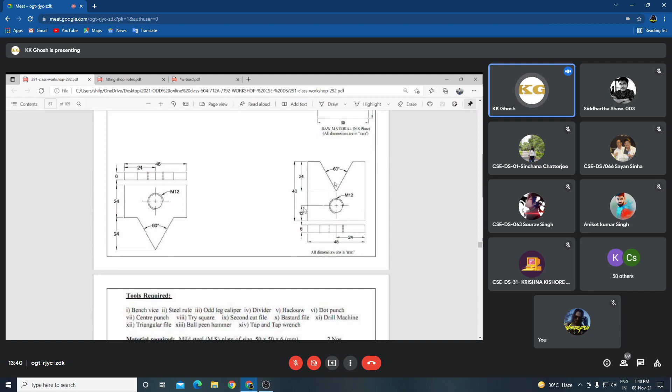Yes, sir. Okay. Next, to produce a V groove or drill hole or V projection, we have to use these types of tools in this shop. Tools are bench vise, steel rule, odd leg caliper, divider, hacksaw, dot punch. All things you will see in your live class. So you will ask the teacher, Dhiman sir, please show us these tools. So you will get a rough idea or 3D view of these tools.

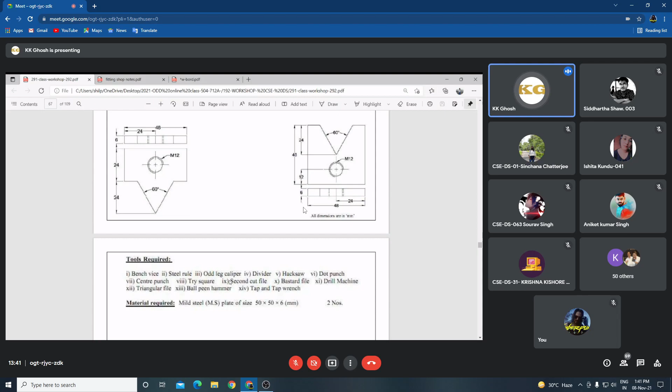Material: mild steel. MS, mild steel plate. Size is 50-50-6. So you will read the manual carefully because in your viva, we will ask you in your fitting shop which type of material you have used. Your answer will be mild steel, not MS. If you tell me MS plate, then the next question will be: what do you mean by MS?

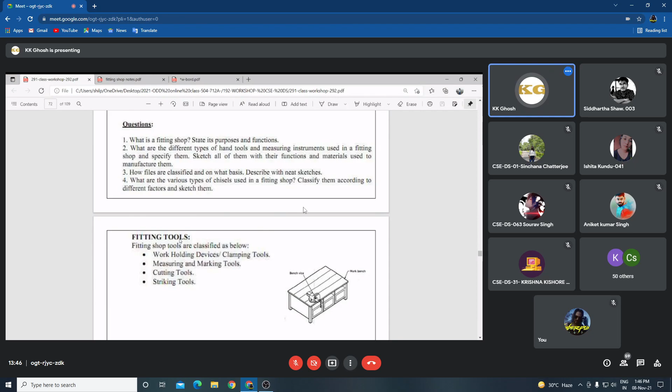Okay, now the question is: what are the different types of hand tools and measuring instruments used? Now I'm showing you fitting tools. These are the different types of fitting tools that will be used for this shop - four types of tools: work holding devices (holding tools), measuring and marking tools, cutting tools, and striking tools.

Holding tools will help you to hold the workpiece or the job. Measuring and marking tools will help you fix up the dimensions on a raw product to produce a finished product, helping you mark and determine whether you will remove or add some material.

So marking is complete through the help of marking tools. After that, there is the cutting tool. Cutting tools will help you cut at your mark line or marking position.

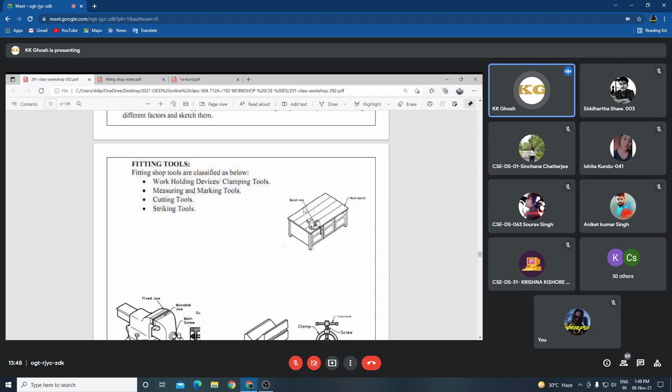Now, work holding device tool - one of them is this table. On this table, a vice is there. This vice will help you hold your job. If you see this, that is your vice - this is your bench vice. If you rotate this handle, what will happen? A gap will be produced, and in this gap you will place your job to hold the device.

Another thing, that is the V block. The V block will also help you hold a cylindrical object.

In today's operation or experiment, you have to make a V block like this, which will help hold cylindrical objects. In your shaping machine, in experiment number 2, we will produce these types of objects, which we will use in the fitting shop to hold a cylindrical object like this.

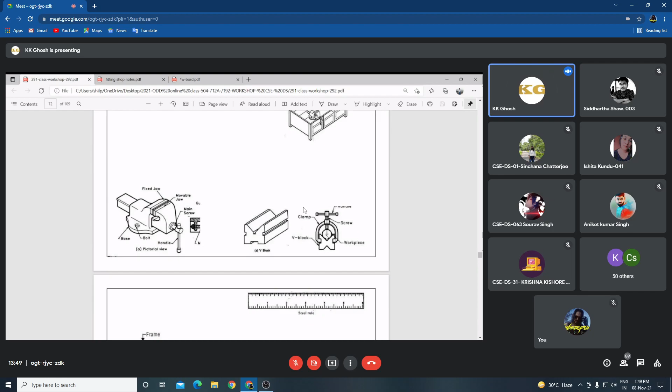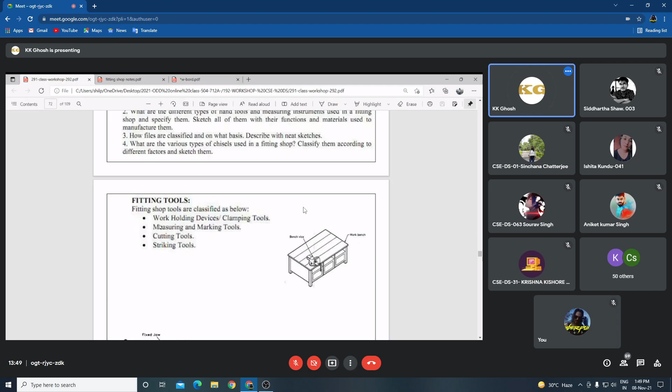So this is your holding tools. That means this is your holding tools. After that, we will discuss measuring or marking tools and cutting tools.

Steel rule is also a measuring tool. Caliper, different types of caliper is there, inside and outside - all are measuring tools. That means you will take some dimension, maybe 10 millimeter, 12 millimeter, with the help of this caliper, and you will place it on the rough surface and mark where you will use the cutting tool to remove the metal. And this is the cutting tool.

With the help of this cutting tool, you will remove extra material present in your job or on your partition line or cutting line. So these are the cutting tools, and this is the measuring tool. You will give the different types of cutting tool and measuring tool details in your notes. I am showing you samples of cutting tool, measuring tool, and holding tool like this.

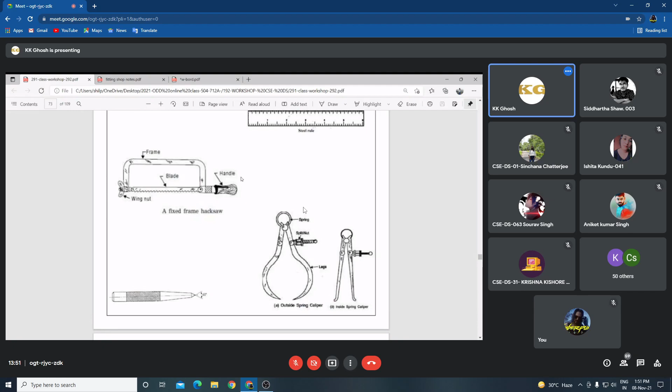Next, file. File is a tool used for striking purpose or finishing purpose. That means these tools are the finishing tools. Hammer and file are used in the fitting shop for finishing purpose, to finish the job and get a smooth surface finish. For this, we will use this type of tool.

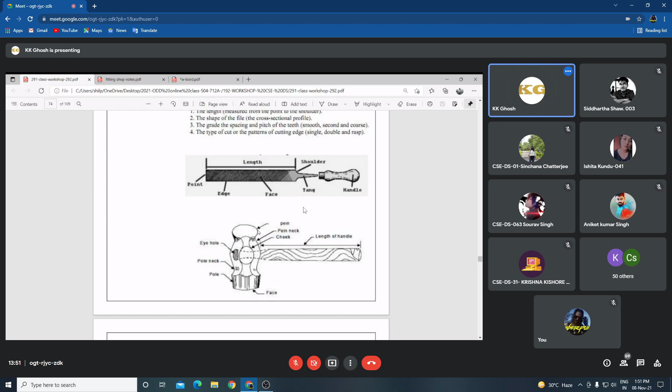Clear? Yes sir, okay yes sir. Now we will try to find the answer as well as details of these different types of tools and procedures. That is why I am showing you the notes that I will provide you after completion of your experiment.

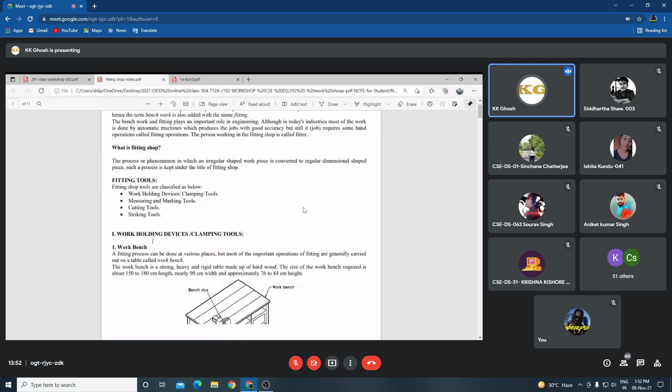This is the note on fitting shop. If you read this paragraph, you will get a definition of fitting shop - what is fitting shop, and fitting tools. These four types of tools will be used. Now, work holding device or clamping tool.

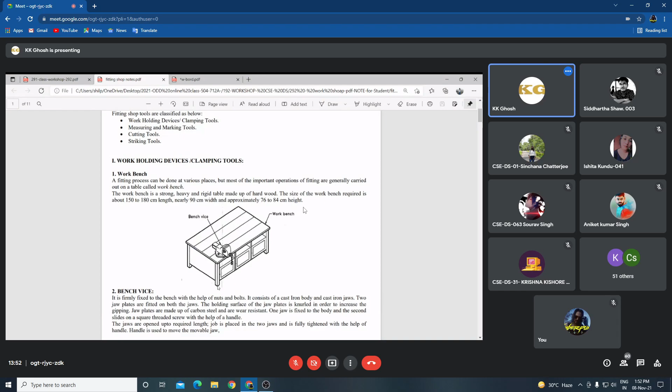Now we are showing different types of work holding devices. Workbench - that is your workbench, and that is your bench vice. That is a detailed portion of the bench vice. V block.

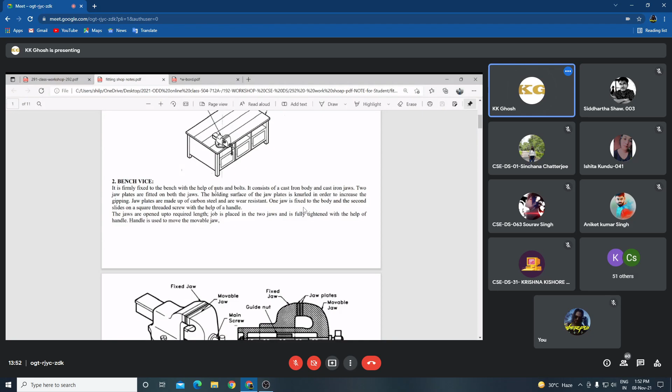Now, measuring tool. When you write down the answer to the question about the different tools used in your fitting shop, you will write down bench vice. After that, you will take suitable 3 to 4 sentences from this paragraph, as well as take the diagram to show all the parts here.

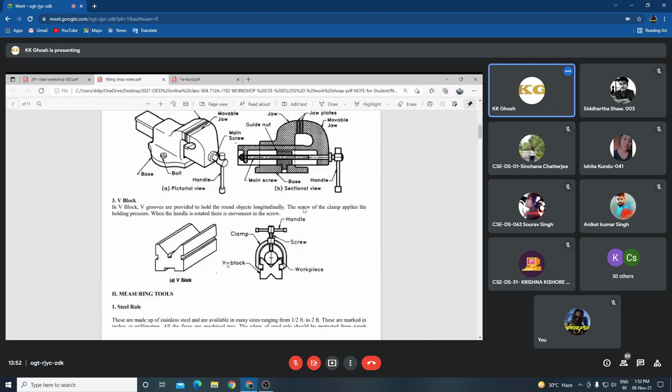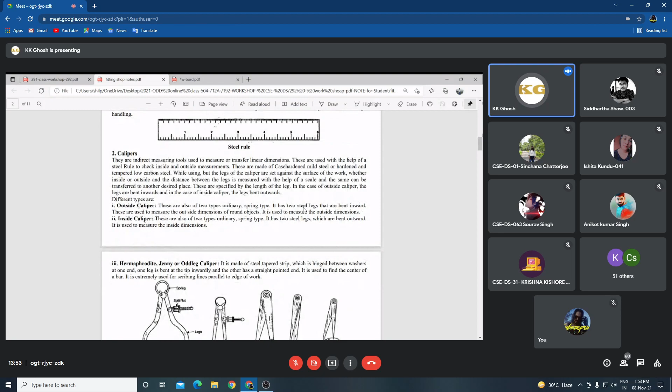Next is measuring tool - steel rule, caliper. Now see, there are two different types of caliper: one is outside caliper, inside caliper, and odd leg caliper.

Next, marking tool - in your marking tool, that is the surface plate. The surface plate is a tool where we will check the surface smoothness. If you put your job on this plate, and if there is a gap between the surface and job surface, then the surface is irregular. From this irregular shape, you have to convert it into a smooth surface.

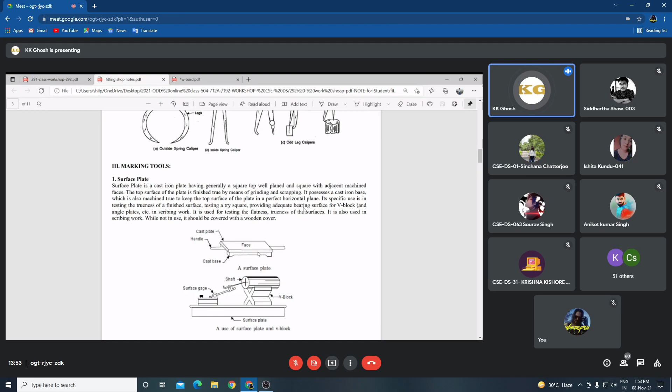A rectangular type object will be placed on this surface, but a cylindrical object will be placed in your V block with the help of the surface plate to check the straightness of the surface. That is the use of surface plate. But when you write down marking for surface plate, no need to write the full paragraph - just take 2 to 3 sentences and only this figure.

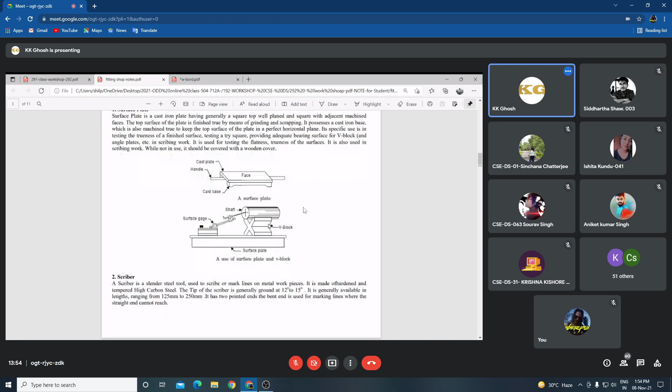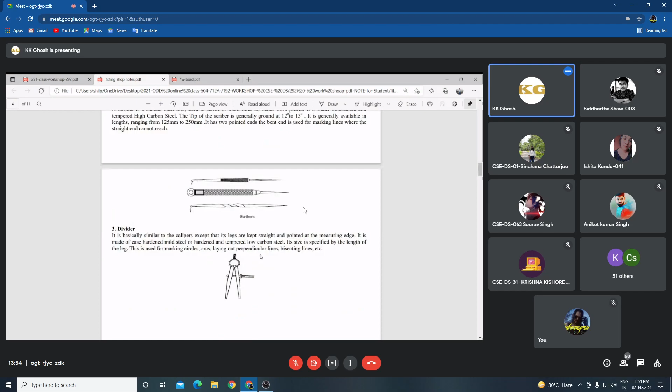Next is scriber, which also helps you mark the line on the raw material or raw plate. Divider - do you know the function of divider?

Divider. What is the function of divider? It is used in your class 10 geometry subject, geometry portion of your mathematics.

Have you used this divider? Yes sir, divider is used to take the distance between, the dimension, to take the dimension from the scale. After that, you will transmit this dimension in your drawing area.

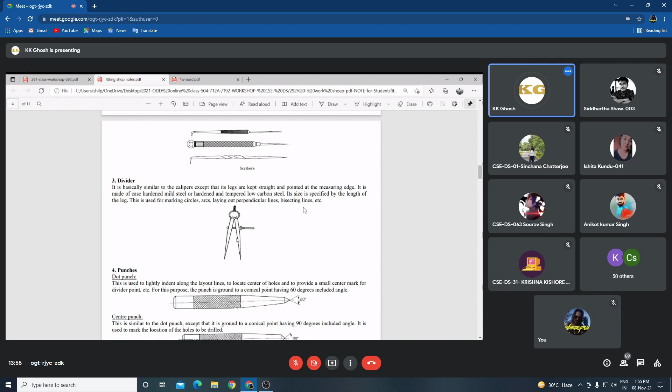Next is punch. What is the function of punch? Punch was already used in your previous experiment.

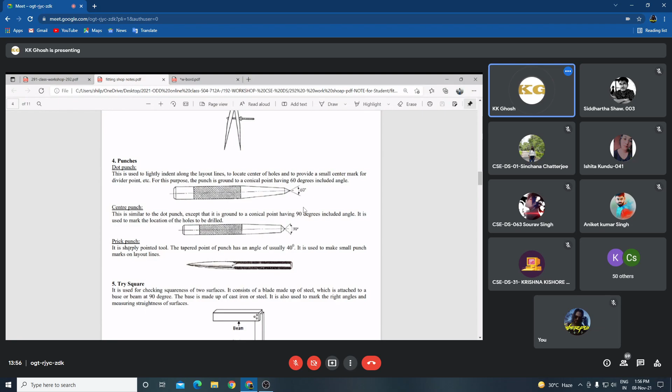Next, try square. The function of the try square is to make a straight line that will be perpendicular to each other, or 90 degrees.

For drawing a 90 degree line, but also to check the 90 degree angle between two surfaces, this try square will be used. That is why the try square is frequently used to check the straightness as well as the 90 degree angle between two surfaces. If you read this paragraph clearly, you will get this answer.

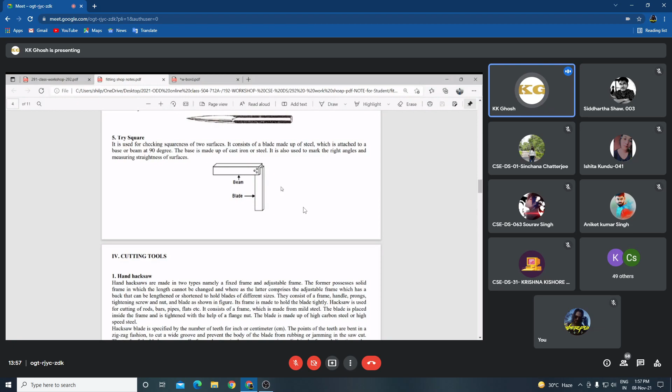So whoever reads this note will be able to give the answer. Clear?

Yes sir. Okay, next, cutting tool. With the help of cutting tool, we will remove a certain amount of metal. One is hacksaw.

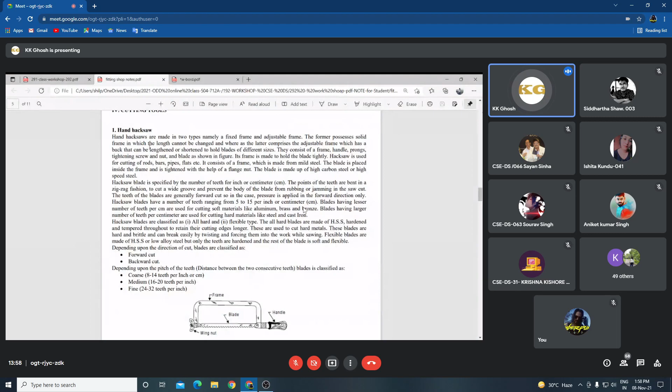Hacksaw will be used to remove or cut some portion from an object. The hacksaw shape will be like this - this is your hacksaw blade. The cutting edge is produced in this teeth form.

This hacksaw will be classified into different classes, just like forward cut, backward cut. That means when your saw moves forward, cutting operation will be done, but during backward, no cutting operation occurs for a forward-cut saw. But for a backward-cut hacksaw, during backward motion, it will be able to cut the metal.

Similarly, coarse, medium, fine - that means how many teeth are present per inch. According to this, the hacksaw is classified as coarse, medium, or fine. If it is in the range of 8 to 14 teeth per inch, that is coarse. If the teeth increase, then medium. If the number of teeth is more than 24, that is called fine hacksaw.

Also, the shape of the hacksaw can be classified into different classes like this - forward, backward, and number of teeth.

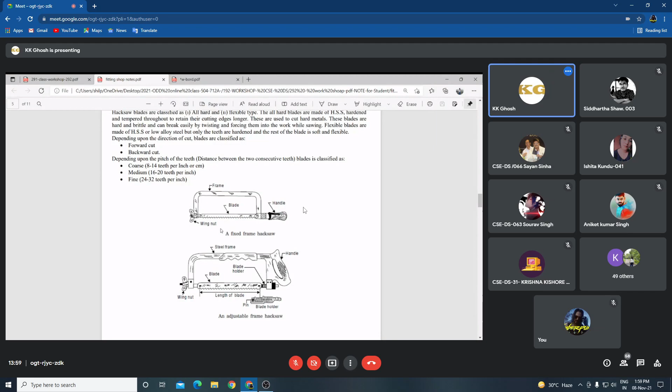After that, file. This file is used for finishing the product. Actually, the function of the file is to reduce the roughness of the product, or for smoothness of the surface.

And this file, how do we identify it? If you see the question given in your manual - identify the file, or what is the specification of the file - that is the answer to this question.

That means length, shape, grade, and type of pattern - that is the specification of the file. This file removes a small amount of material.

It will be classified as single cut file or double cut file. If there is one inclination of the surface, it is called single cut file. If there is double inclination, that means it will remove a very small amount of material for smooth finish.

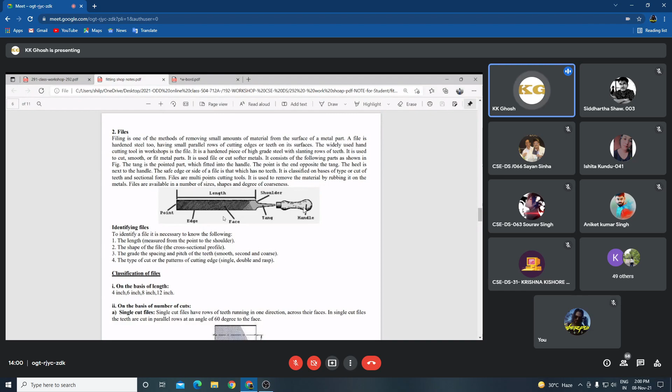So you will see this, you will also observe. You will ask the teacher: sir, show us the different types of file. There are different types of file, around 4 to 5 types. So you will observe, okay, and minutely observe the inclination.

Now see this - this is your single cut file, single inclination. This is your double cut file, double inclination. So you will observe minutely.

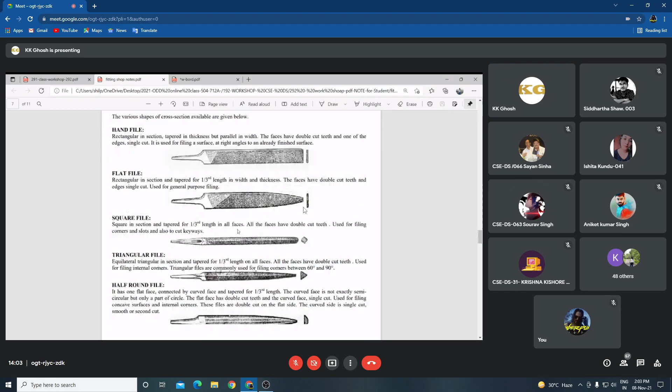Okay, yes sir. So you will observe all these files. Sir will show you the different types of file on the basis of grade, like number of teeth. Hacksaws were also classified by number of teeth per inch. Similarly, the number of teeth present in this file per inch also gives the different types of classification of the file. And next is chisel.

Chisel will help you to cut some portion in the object. Hacksaw and chisel: chisel will be used to cut or to give a finishing portion, finishing cutting. And to partition in between two portions, we will use the hacksaw.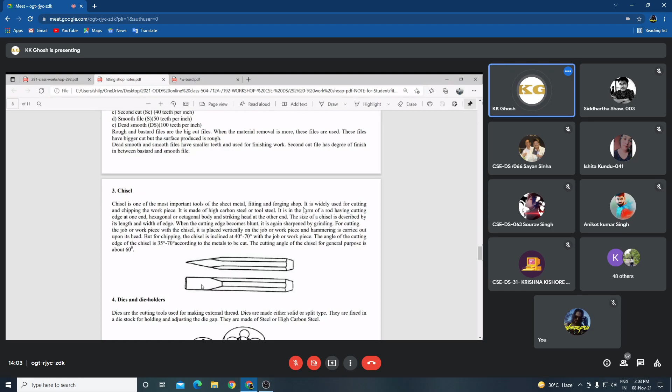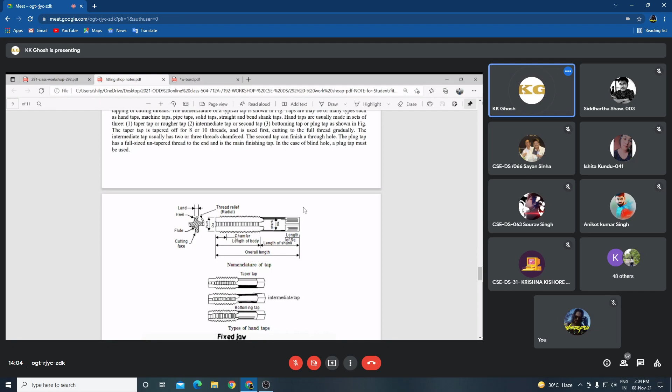And the next tool used is taps. A tap will be like this. See, this thread portion is here. So when you place this tool inside a drilled hole and then rotate it, a thread will be produced in your hole portion. That means to produce thread inside the hole, just like a nut.

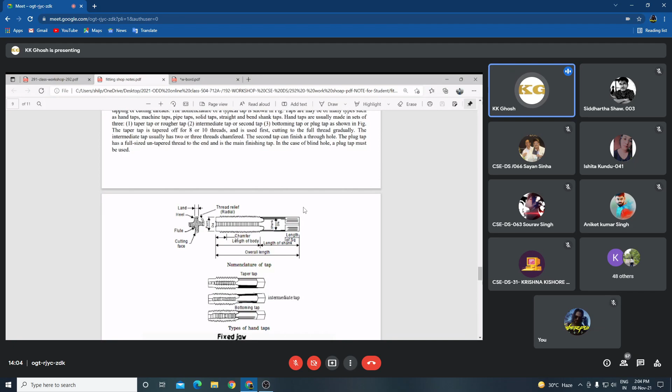If you see a nut bolt, in the nut portion some thread is there inside the nut. So to produce the thread in a hole or nut, we will use a tap. So the tap is the most important tool to produce the thread inside the hole. Okay. Okay, sir. Now how will we produce the hole?

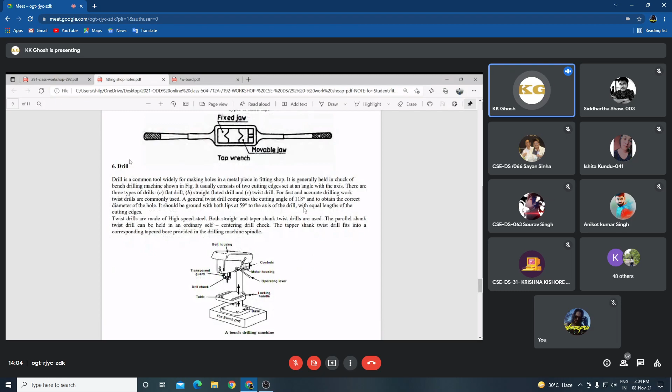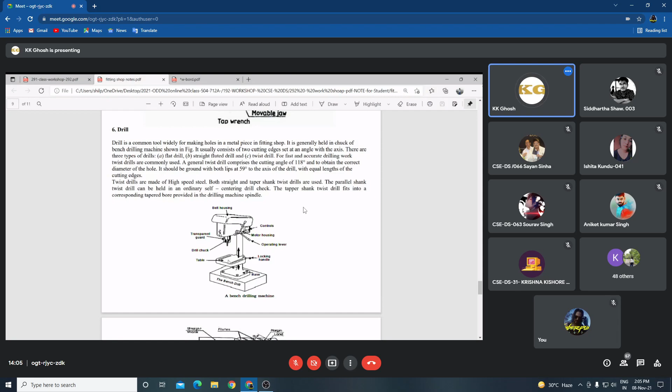To make a hole, the drilling operation will help you to make a hole in a plate. So this is a drill machine. If you place the object here, this is a spindle or tool. If you put down this tool head on the surface, a drill hole will be produced. Now this is your drill tool, and that is called the drill spindle.

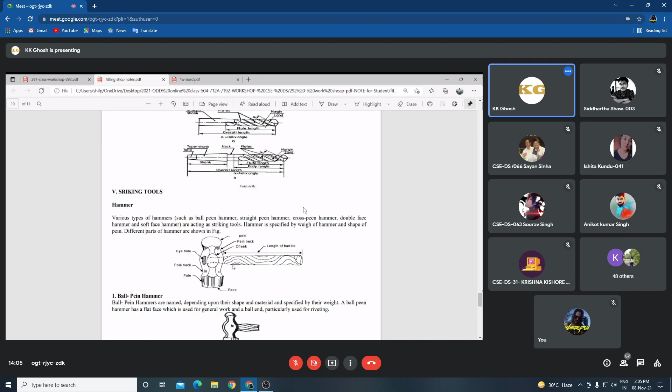So this drill will be placed in this tool hole, and the object will be placed here. So during rotation, it will produce a hole on the surface. And next is the striking tool. That means a hammer will be used for striking.

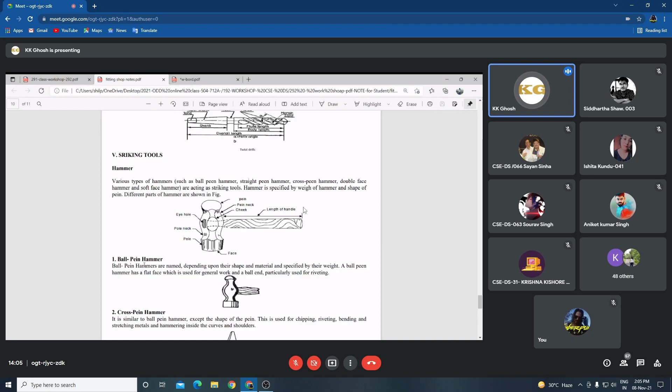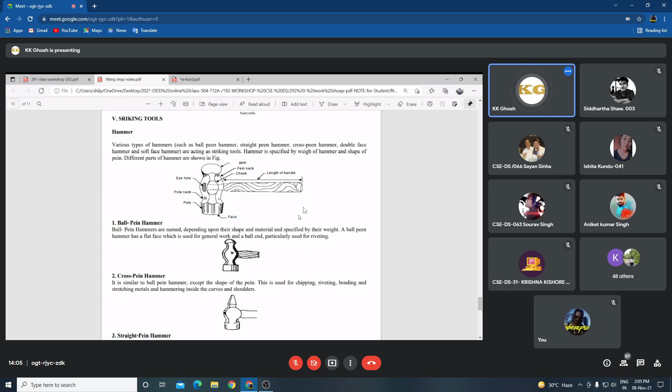Hammers are also classified into different types: ball peen hammer, cross peen hammer, according to the shape and size. According to the shape and size as well as mass of the hammer, it will be used in different places for different purposes. Suppose less force is required, we will use this ball peen hammer. When heavy force is required, we will use these types of hammer. So according to the purpose, we will use different types of hammer. Okay, that is your striking tool.

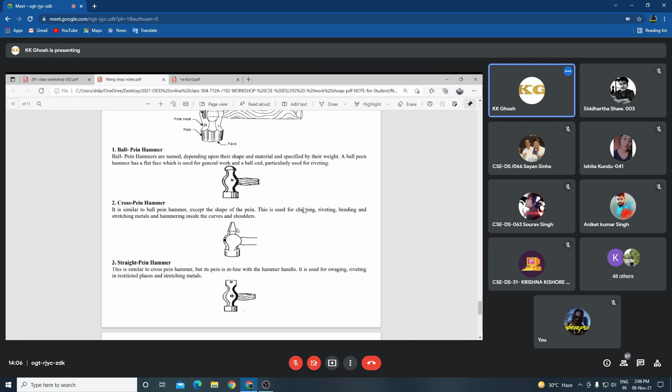So ultimately you have to study these four types of tool: holding tool, measuring and marking tool, cutting tool, and finishing tool. Okay, so after that you will get a final product of two pieces, and you will assemble them, then you will get a total complete job. Clear?

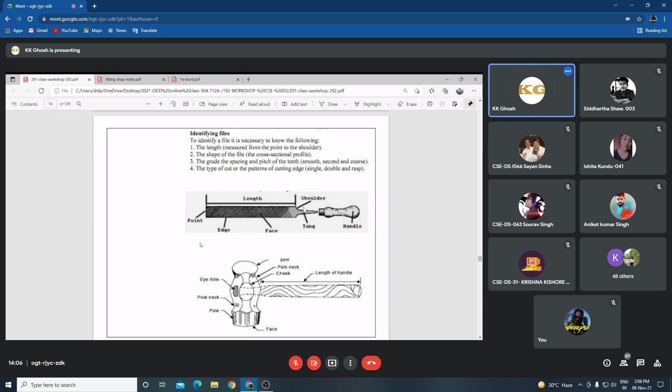Yes, sir. Okay. So we are coming to our job. So this is our workpiece. From this workpiece, we will produce these two parts, part one and part two, and after that we will assemble them. So we will get the job.

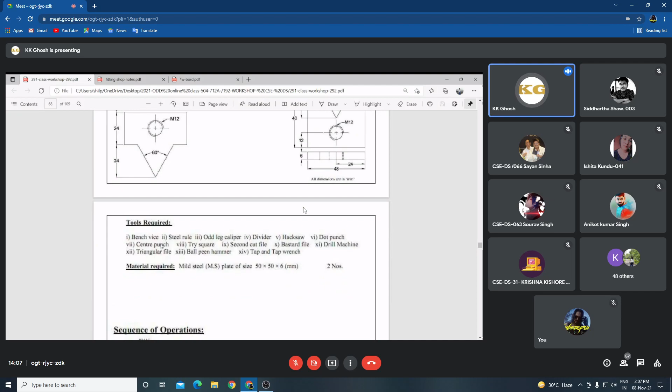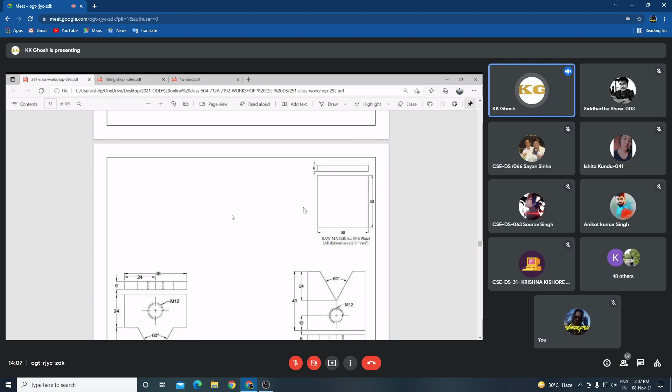For this operation, you have to study these tools and this operation, and also you have to answer the questions to make a report. So you will wait. He will explain to you the different procedures and also show the different tools used in the fitting shop. Okay. Has he joined or not?

So this is a steel rule. I think all of you know this. This is a measuring tool. Okay. Now, these are all files. According to shape, there are so many files. Okay. First, see, this is a flat file. This one is called a flat file, and it looks like this. This is a flat file.

Now, see the cross section. This cross section is circular. This is called a round file, and its cross section is circular. This is a triangular file. See the cross section: triangle. This is called a triangular file. See the cross section. This is half round, that means it's semicircular. This one is a half round file.

And this one is the square file. So according to shape, there are so many files: square file, half round file, triangular file, and the one mostly used in your shop is the flat file. Okay, so these are all files. This is a saw, cutting saw. This black part is the frame, and this is the blade. This is a cutting saw or hacksaw, whatever you say.